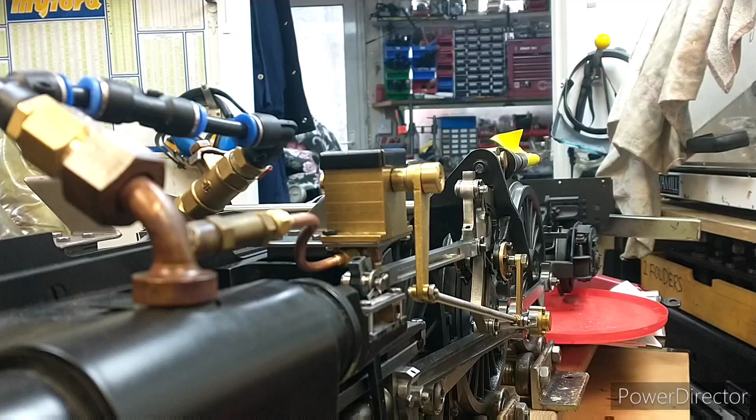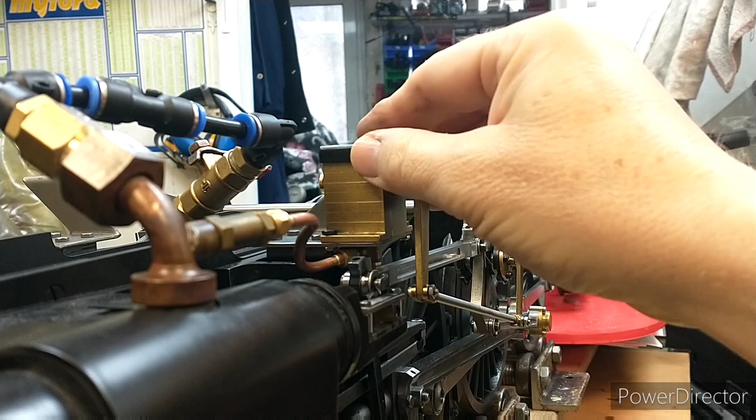So if you remember a couple of episodes back we temporarily fitted, this is actually a Modelworks or Winson lubricator, but we don't have two of them, we only have one. So I think what we're going to do today is actually make two new lubricators that match, because I've got the parts to make them, or most of them.

The main bit missing is this actual outer casing, so yeah, I'm going to take this off and then we'll go to the bench and have a look at what bits I've got and what we need to make.

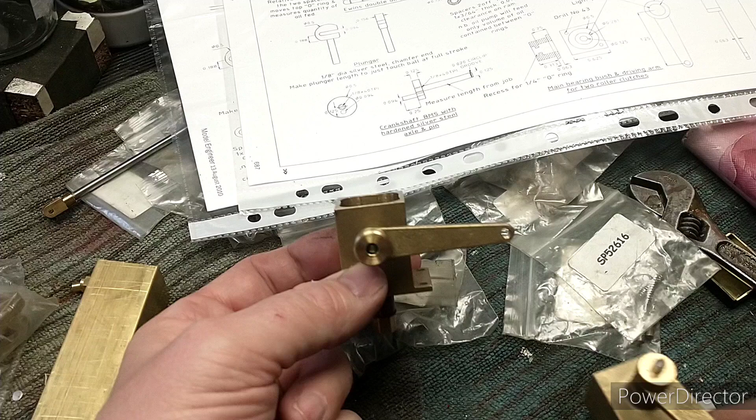Okay, so just a little recap on what we have and haven't got. So I bought this off eBay, and this is I believe from a Winson kit. So it's an earlier design, and this is the latest design you can buy from Steam Fittings.

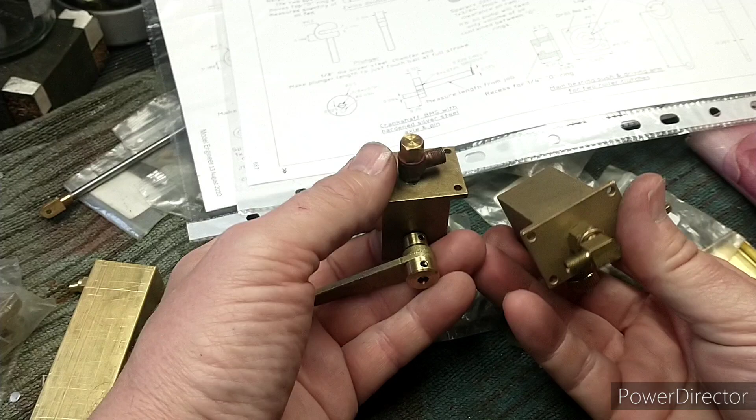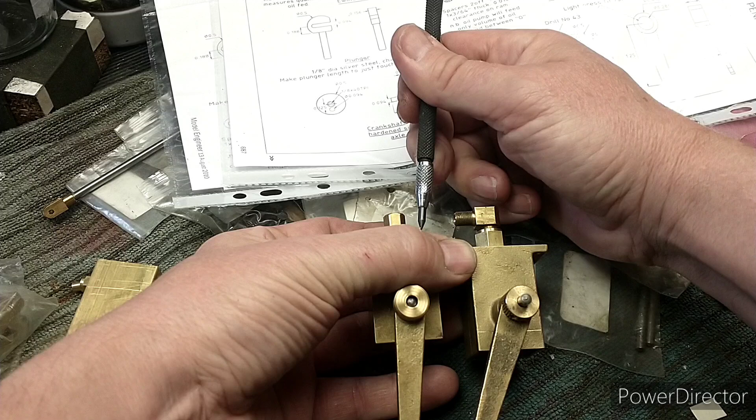So a couple of things we need to look at really is if we look at the height that the outlet comes out of, this is too low down. We've got the slide bars about here, so we need the outlet to come out at this height. So I could modify this design, make this area shorter, which is probably my preferred option at the moment, but we'll come back to that.

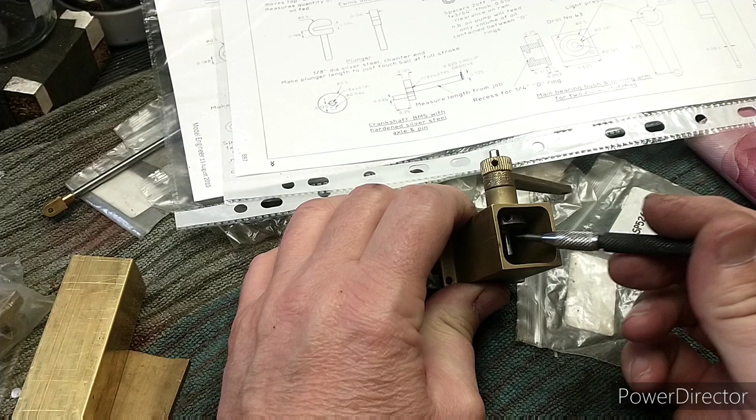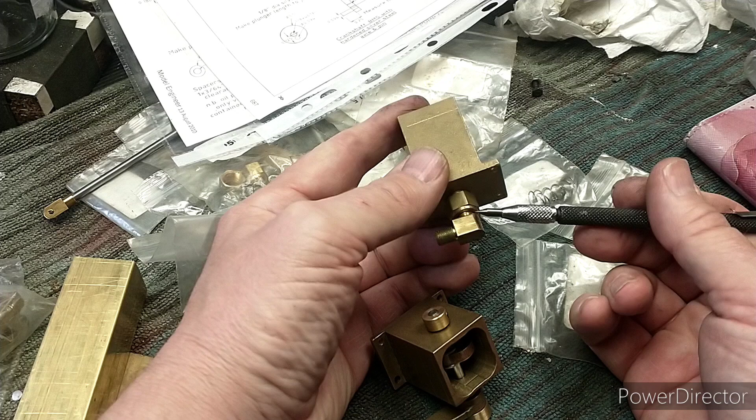I quite like the more modern design because it does away with the crank, and also I think I've got the crank parts. Yeah, here they are. So I've got crank parts for this style of design already. What I don't have is this internal body, I don't think. So I need to have a look through, but I like this design because it just uses a spring to do the return. You know, I've even got the springs, whereas this style uses the sort of Scotch yoke idea. It's a bit more difficult to manufacture.

So kind of internally we want something that looks like this. Externally we want something that looks like this. So that's the problem we have to solve this week.

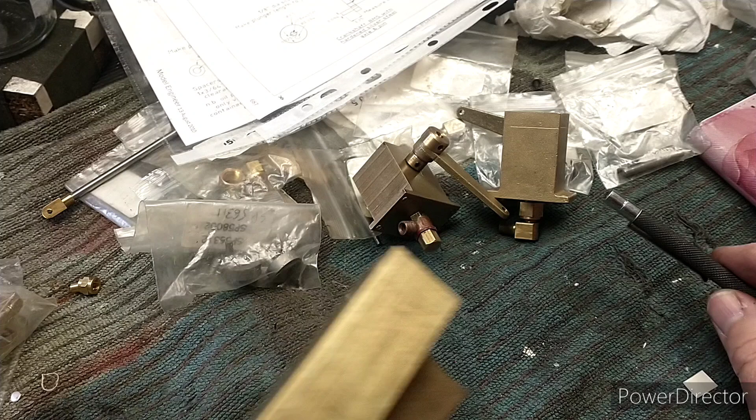So what I'm actually going to do is not use either of these two, but I've got some brass square tubing. It's 1 inch square. I've got some plate, so the idea would be to silver solder on like this. This is conveniently the right width, so that's the kind of idea I'm doing. And then I'd need to add in a boss as well. So I've got quite a lot of parts.

You know, I've got these right angled adapters. These came with the kit, so it's obviously designed for perhaps the more modern style, but just need to reduce this height somewhat. So we've got some internals, but I don't know if these are for this particular design or whether they're for that design. So yeah, I'll have a rummage through all this lot and decide what we're going to do.

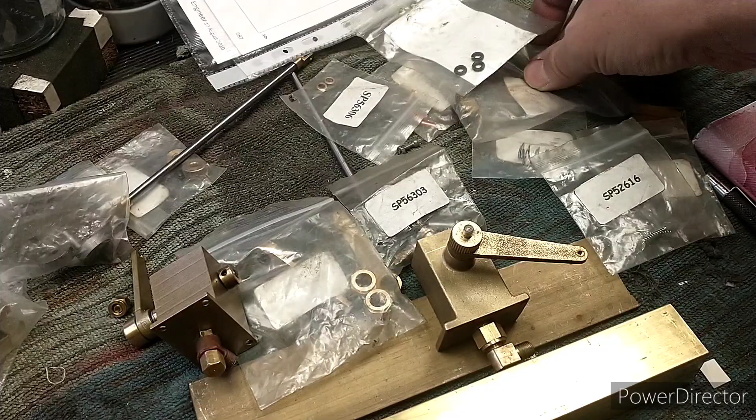Obviously I've got the original drawings which this design was based on, so I can compare it to this as well, so that's quite useful. I'm just dismantling the commercial one so we can just have a look at what parts I've got and what parts I haven't got.

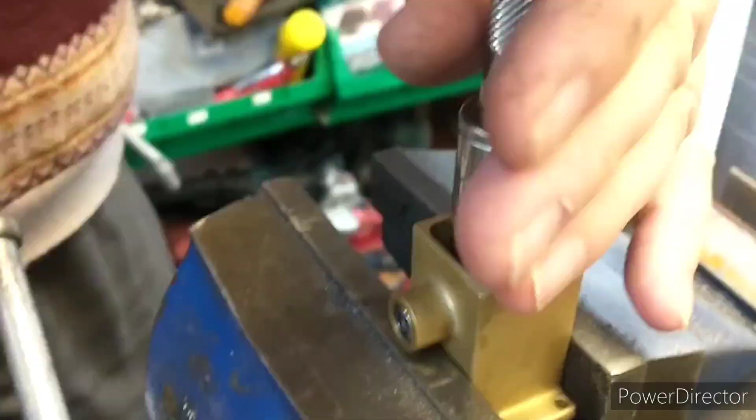Okay, so we've got the modern Steam Fittings lubricator taken to pieces now. Had a bit of a job getting this threaded part unscrewed from here, because you need quite a deep socket to get to this. I think it's 1/2 inch. Well, I think I used a 13mm deep socket.

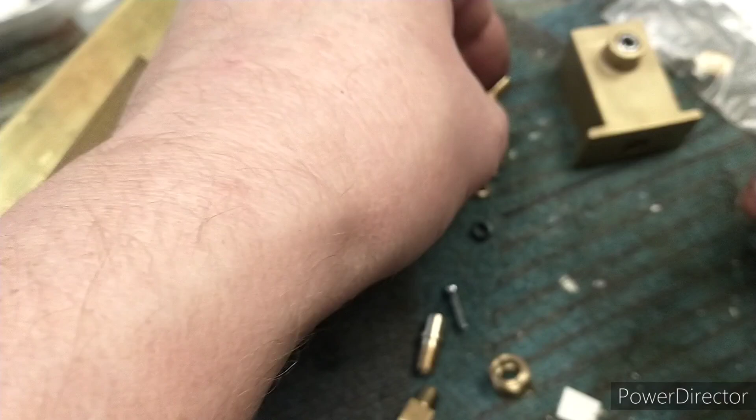But yeah, I think I haven't got any of these parts, so that's going to be an interesting part to make. We've got 2 holes going through at an angle, looks like 45 degrees. That's where the oil actually enters the pump, and there's quite a nicely machined flat surface at the bottom, which is where the O-rings butt up against. That shoulder provides somewhere for the spring to sit, which is quite nice. We've got the springs, so quite handy.

So you've basically got the main pump body, O-ring, spacer. The spacer height changes the amount of oil that's pumped on each stroke. Then you've got the lower O-ring, which acts as a seat for this ball, and then we've got a spring just to preload the ball onto the seat, and then we've got a little spring body that holds the ball in place, and obviously that butts up against that and helps compress the O-rings.

And then you've got the usual conical fitting on the bottom for a pipe fitting. So I've got quite a lot of these parts. I've got the O-rings, I've got all the springs, I've got these shafts, I've got a couple of these anyway, what would you call them, crank I suppose. So actually, yeah, these might be usable. Yes, because they are slightly shorter as well, which is kind of what we want. And we've got the nuts as well.

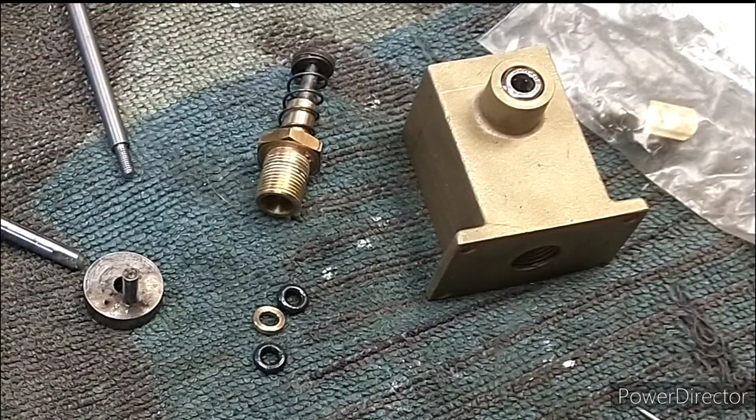So we've got a lot of the parts, and we've got obviously these right angle fittings, which I only need for the 2 I'm making for Britannia. So we have got quite a lot of them. Yeah, so I'm sure I can find a ball bearing or 2. And it's just basically the pump body, the plunger I haven't got, and the actual casing itself.

So we've got some material to make the casing. I'm sure I've got some hex bar stock to make this. I'll have a look at how this is manufactured, but I think it's possibly just machined from normal brass. So that's quite a small part from quite a large blank. That might be quite interesting to make. Might be easy to make in 2 parts actually, but we'll see.

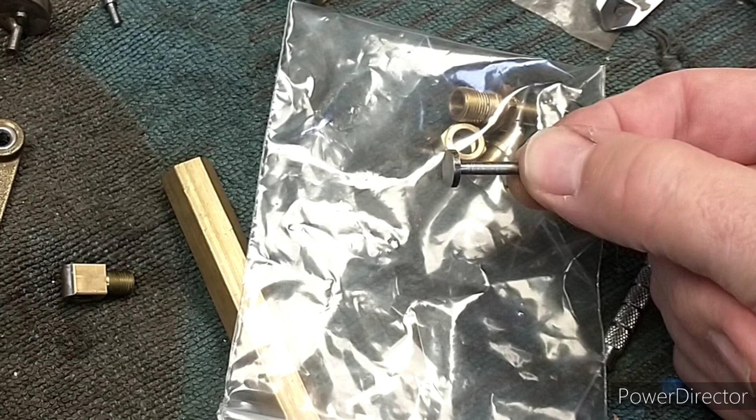So off camera, I've been starting to get some raw stock together. I've got some 1/2 inch hex to make the main body. While I was doing this, I was thinking one of the important things, or something that you gain with experience really, is when you start looking at parts you've got to make and selecting materials, you start to get a feel for where accuracy is required and where it isn't.

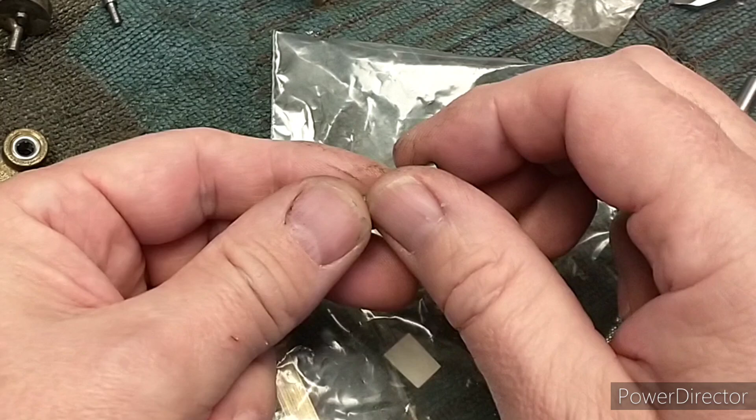So as an example, I'm just going to show you this part. So commercially this is made in 1 piece, which is, yeah, their decision. But I don't know if you can really see here, but the finish isn't actually that great, and that finish is rubbing on a rubber O-ring, and that's obviously going to wear the O-ring. So anyway, looking at this part,

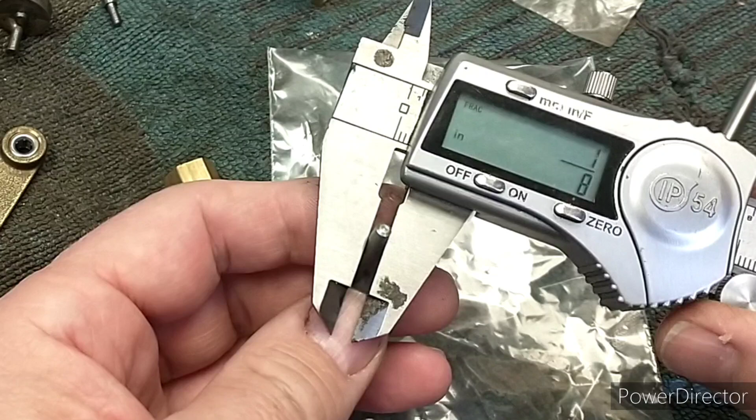the most critical dimension is this diameter, and it's basically 1/8, and that's sized to match the bore of the O-rings. The size of the head is about 9mm. It doesn't really matter, and I don't think the thickness matters particularly either. Probably the length does, and if you can see, there's a little chamfer there. That's quite important, just to ease the shaft as it goes into the O-ring, so it doesn't damage the O-ring.

So if you were making this from some 9mm bar, this in comparison is quite thin. You're taking off a 3mm cut effectively. Now if you're using a CNC machine, you could probably do that cut in one pass and get decent results, because obviously if you're trying to just do a skim pass on something that thin, it's going to deflect a lot. But on a Myford, there's no way I could do that cut in 1 or 2 passes.

So for my case, and thinking about where the accuracy lies, I have got some 1/8 silver steel, and this is obviously ground. It's got a little bit of corrosion on, that'll clean up, but it's a ground finish, so that's a really lovely smooth finish. So what I'm thinking is that I'll use this to make the shaft, just some 9mm bar to make the head, drill a hole through the head, and then silver solder this shaft into the head, because again, this area here is not particularly critical.

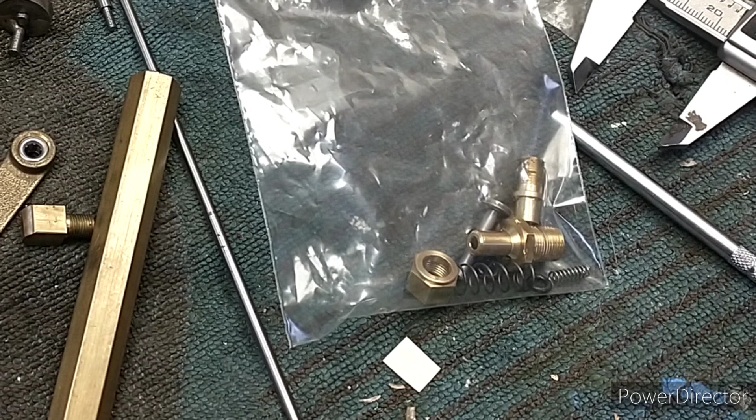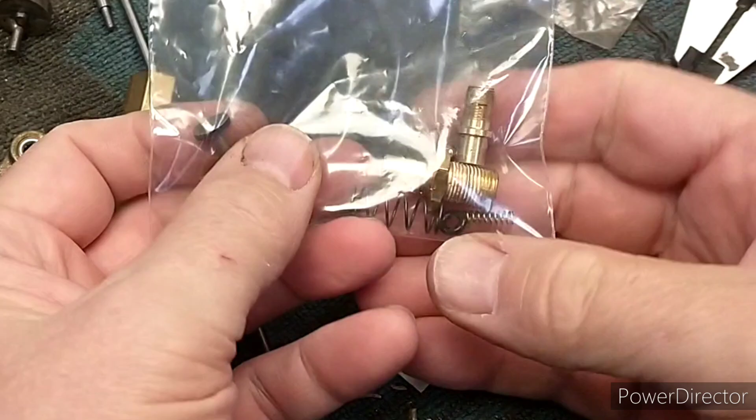So yeah, I just thought I'd mention that, because it's part of my thought process when I'm assessing how to make parts. Some people like to write down machining operations. I'm not usually that organised, but I do try and think through the order in my head. So just a few thoughts on machining operations really.

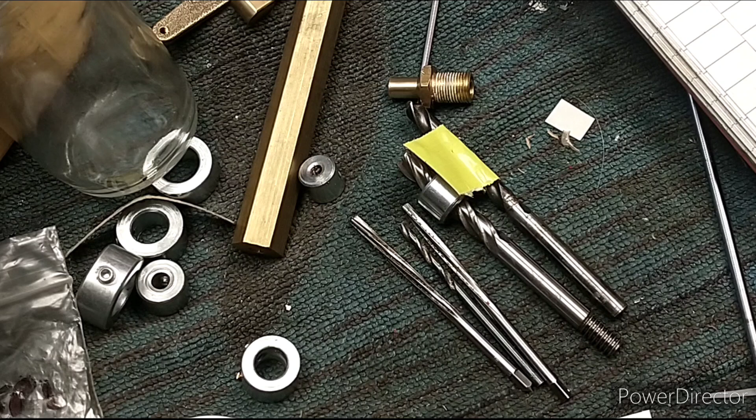So I'm going to make the pump body first from 1/2" hex brass. It does call for phosphor bronze, but I think brass will be fine. So I'm going to start machining from this side. It's a 3/8 32 TPI thread, so we can machine that up quite quickly.

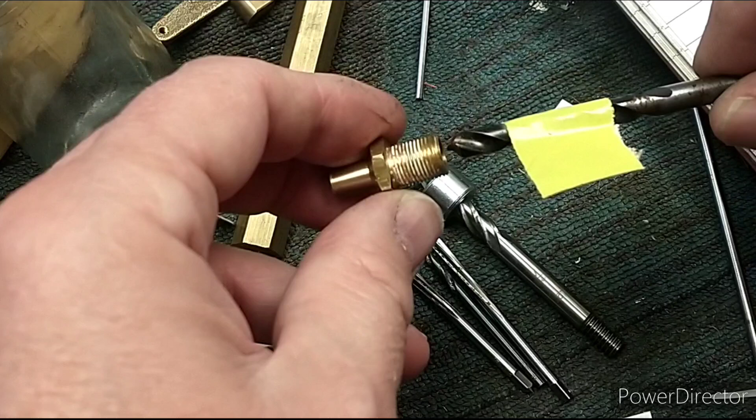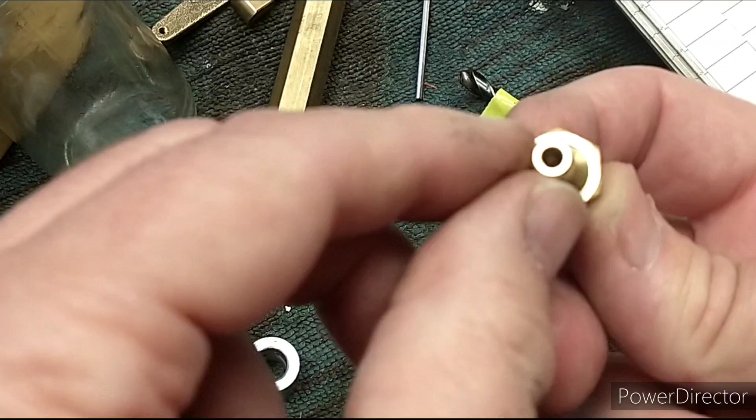And then I'm going to drill one size below 1/4 inch, and then I've got a 1/4 inch end mill there that will just give me a nice flat bottomed corner. Then we've got one size below 1/8 inch, so we'll go through with that, and then I've got an 1/8 reamer. So if we do all of those operations from this side, including the 1/8 hole through, that will mean all of the circular features will be concentric.

The outside of this isn't particularly important. All it's doing is acting as a guide for the spring. But we want the hole concentric to this hole, so the actuating pin goes through the centre of the O-rings. So we have got some wiggle room there, but if we can get them all concentric, it's all the better, I think.

So I'll basically machine all this end from this side, and then we'll turn around and machine that. And I think I can probably get a tool with that angle on roughly. Again, that angle's not particularly important. It's just to provide an easier to machine area to get these angular holes through.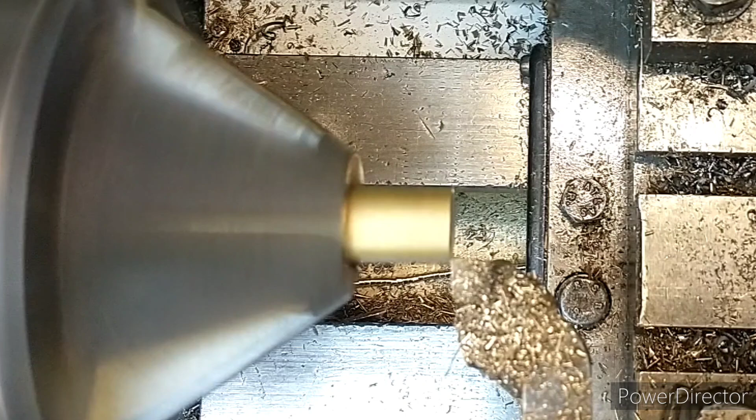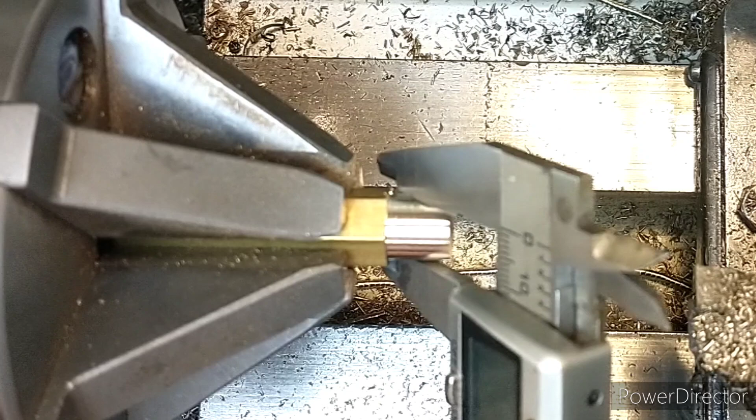Okay, we'll face off the hex bar and zero our DRO. Just set my DRO so I know roughly where we've got to. This is where you get completely covered in tiny shards of brass.

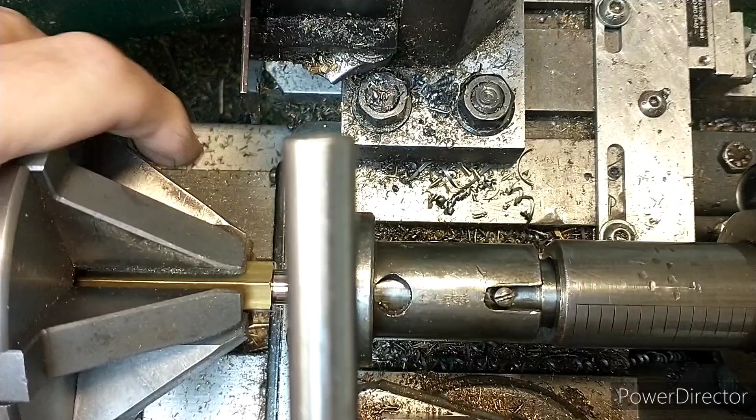There we go. Next job, we'll just round off the edges a little bit. Just make it easier to get the die started. Okay. Right, I'll get the die set up and we'll get it made. So I'm using the tailstock die holder today. So we'll just apply a bit of pressure and then we'll just turn the chuck by hand. It's quite a fine thread, the 32 TPI, so

I don't know if we could jog this. Shall we have a go? Oh yes, that'll work. That makes life a bit easier, doesn't it? Okay, let's try and reverse it out.

Lovely, that's perfect. We do need to just undercut there a little bit. We'll just come in with the blade tool and just plunge it in a little bit. Hopefully that just gets rid of that shoulder. Reshamfer that. The threads have raised the metal slightly.

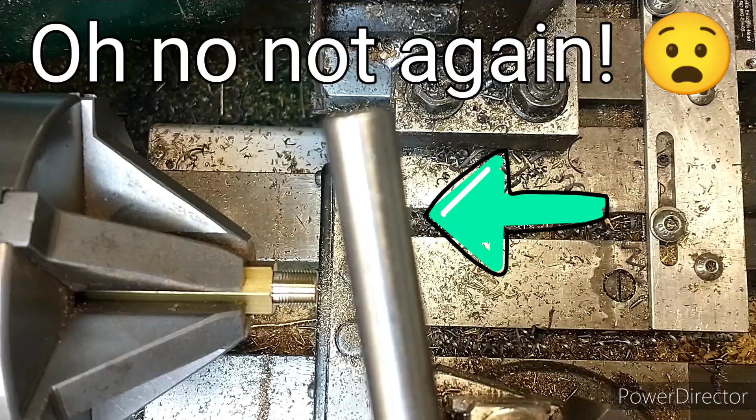Okay, so next job we can do is drill through the 7/64. So I'm just looking at the part that we're making. If this drill goes all the way past where we've got the flutes, that's just about the right depth. Handy little tip in this particular case. So we will need to keep cleaning the flutes because this is quite a deep hole.

Anything over 3 times diameter depth I think is classed as a deep drill. I think something like that.

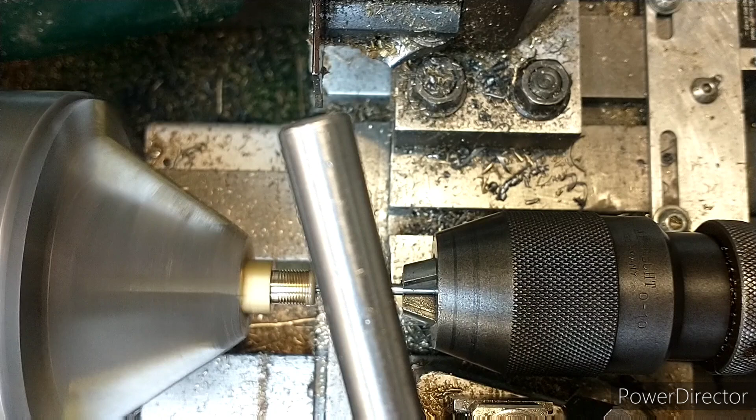Could leave this till I'd done the bigger hole actually, might be a better way of doing it, so we're only actually reaming the part that needs to be reamed. So I should do that. I should change my order of operations for the next part. Right, I think we're up to the end there. Yeah. So that should be a nice 1/8 reamed hole. Again, we can use the part that's going to match effectively.

That seems pretty good. Next job is to open this hole out. So I'm just using a bit of tape as a depth stop. I don't actually want to go all the way up to the tape. I just want to leave about a mil. That's that. And then finally we're going to open out to the 1/4 inch size with the 1/4 inch end mill. The slot drill would be better, but I haven't got a 1/4 inch slot drill.

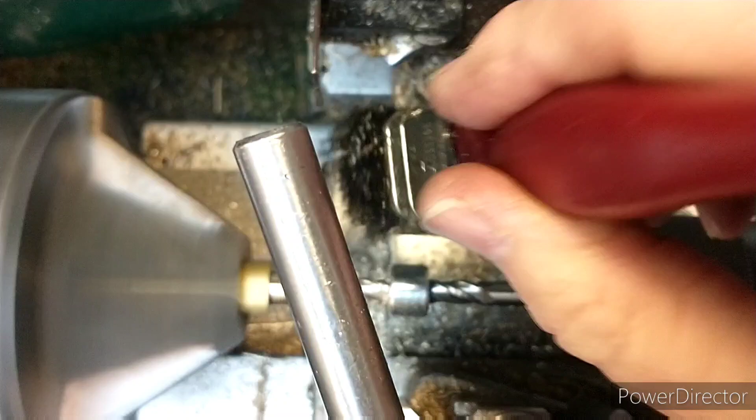Lovely. So that's given us a really nice flat bottom hole. Just going to check the depth of that. Yeah, spot on. So I can now part this off and then make the next part.

One thing I have found is this 6-jaw chuck actually isn't that great holding hex bar. I think it would be brilliant, but you have to get the piece exactly right. Use my handy bendy usual bit of... so, 24.5 long. Go slightly over. So that's the part. So we'll make another one of those.

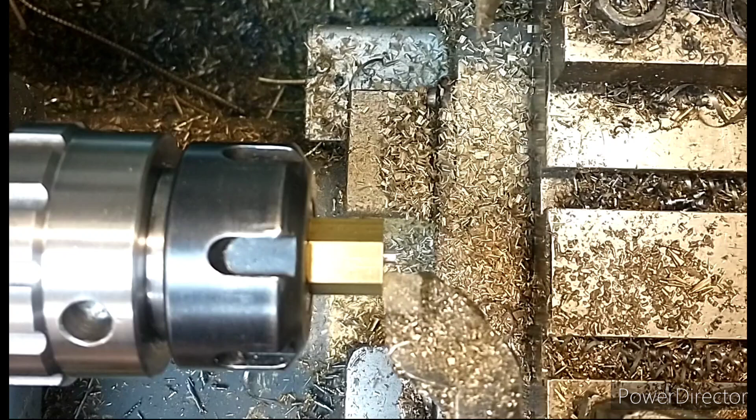Okay, so I've turned the part round and put it in a collet chuck. So I did actually invest in some Imperial ER25 collets. So this is actually a 3/8 collet. So the first job is just to shave 0.1 of a mil off the end of this. I just part off very slightly bigger than I need to. Okay, so that's it now to length.

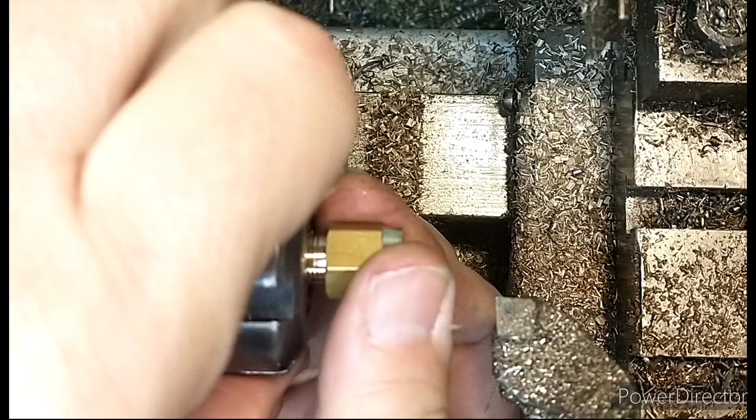Oops. Wasn't as tight as I thought it was. Yeah, I think I was a bit greedy there. I think that was because we were still on the hex part.

We're a little bit below 3/8 in the diameter, so with it being threaded as well, I think that was probably just a little bit too much. Something had to give. Initially going down to 9, which is the extent of the conical area.

Need to find a tool that I can use just to put the 45° on this shoulder. So if we were in a production environment, we'd grind a special tool that would actually allow us to cut this diameter and the shoulder as well. But I found a threading tool, I think it is. It should get in there. So fingers crossed. That's as good as we're going to get now. It's quite an awkward spot to get into.

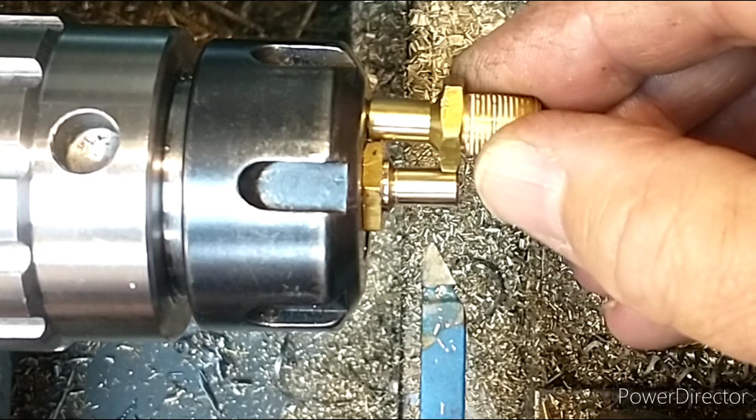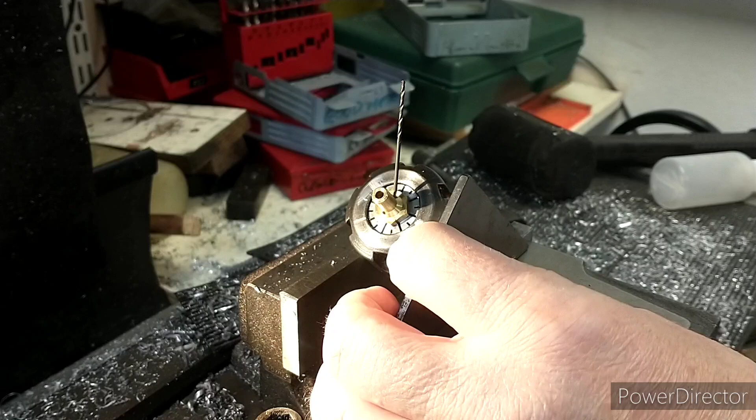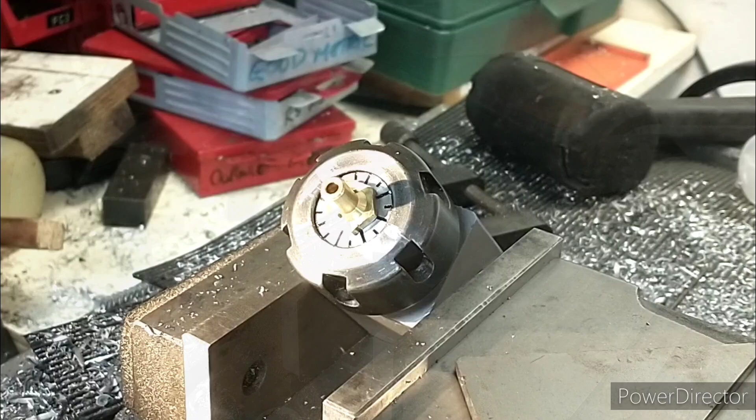Okay, so this is my setup for drilling these diagonal holes. I did think they were about 45. They are about 45, but just not quite exactly 45. So I've sort of lined this up by eye to be vertical. Now the modern design uses a 1.4mm drill, which is what I've used just to set up my angle, and it's only got 2 holes, if you can see there.

Now the original design calls for 1/16 drills, which is about 1.6mm, and requires 4 of them. So I think what I'll do is I'll put 4 holes in, but I'll use the slightly bigger one. The fact that I've got a box full of these, so when I break a few it's not the end of the world, has got nothing to do with that decision.

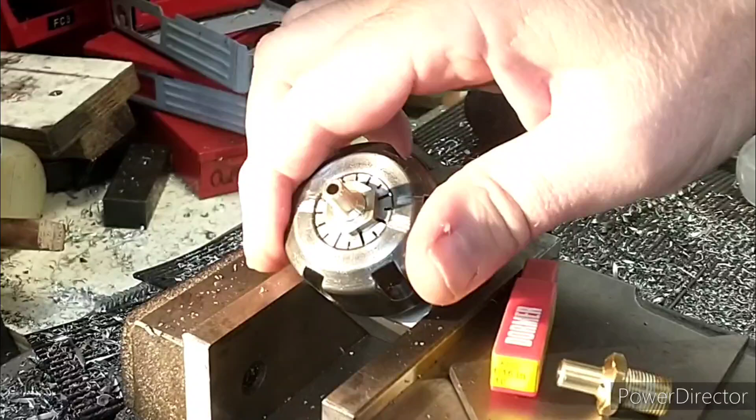So what I think I'll do is I'll keep this fixed in the vise to keep the angle, and then I'll take these out and rotate them round. So I'll try and keep a flat about horizontal. Not critical, I don't think.

And prior to drilling, I've got these stubby... it's probably better to actually see what it is. Sort of stubby spot facing drills. So they're quite stiff. So I think I'll just spot with that one first, because that seems to get in all right, and then follow up with the 1/16. And hopefully we won't break any drills at all, and it'll all be lovely. We can always hope, can't we? So I'll get that set up, and then I'll bring you back.

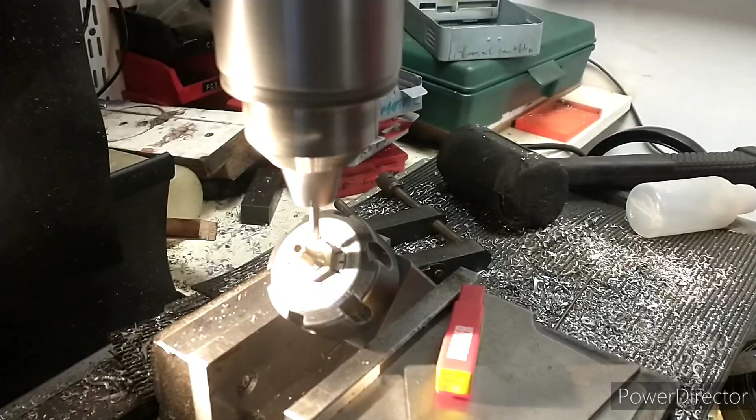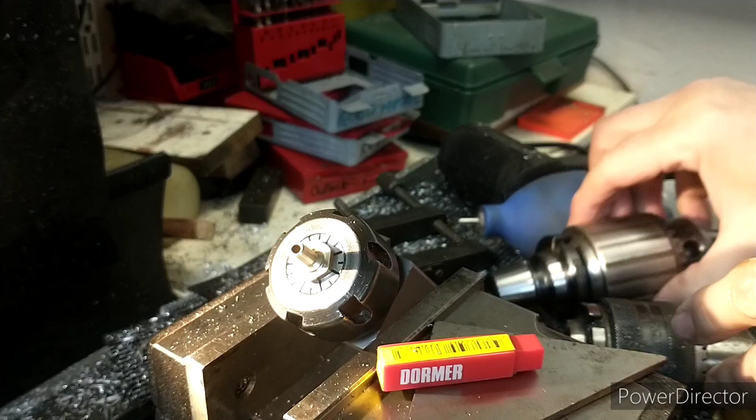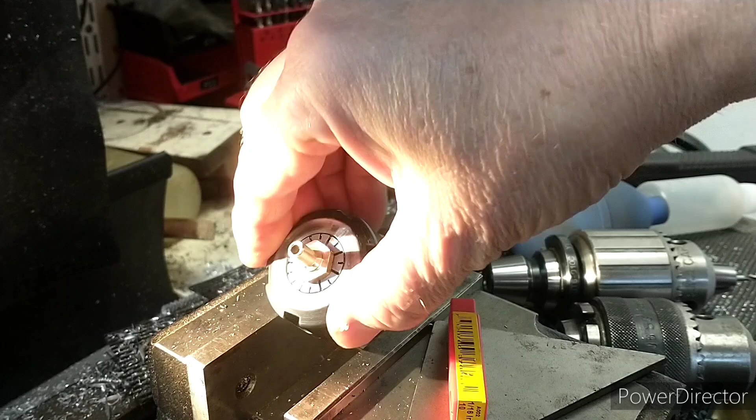Okay, so that's spot faced. Right, that's the first hole done, so 3 more to go. Let's see if we can do it without breaking a drill. So next thing is to rotate this round so that the previous hole's at the bottom, as best we can. Get that there. Not critical, but we'll try and get them opposite each other anyway.

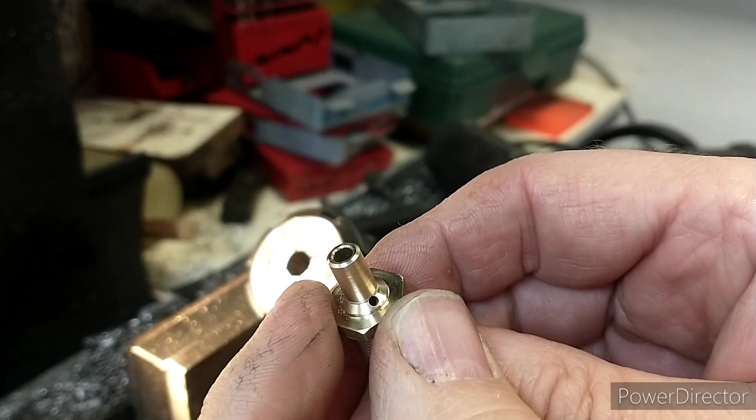So hopefully you can see that. So they've both gone through. Just about see there. So hopefully that's good enough. So I'm just going to run the reamer through by hand just to deburr the hole. I think this reamer's a bit newer, so I'll run that one through as well.

And we'll do that one as well. Not sure if you can see, but I can feel there's a little bit of... it's actually cutting. That's the silver steel. I can certainly feel where the burrs were. But that seems to be okay.

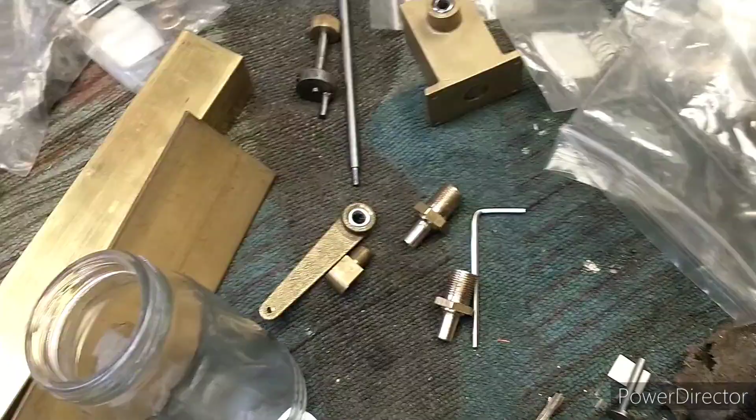So the next job is we're going to make the plunger. So just for Kev, I'll have some gratuitous hacksaw action.

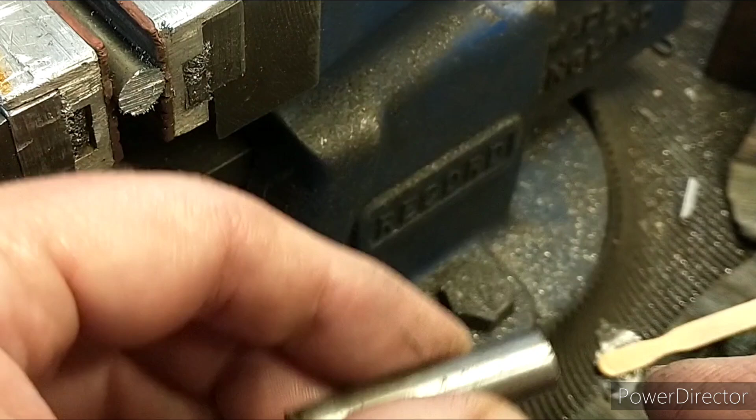So what I'm going to do is drill a hole in each end of this for the 1/8 bar, and then I'm going to silver solder them in place, and then once that's done I shall put this in a collet and just cut off the head so it'll look like that. We'll just put in a parting tool, so that's why I've made this a bit longer, so that we can put either end in the chuck, and there's enough to hold it. So that's a trick, if I can make a part on both ends of a piece of stock, it just speeds things up quite a lot. So that's what we're aiming to do.

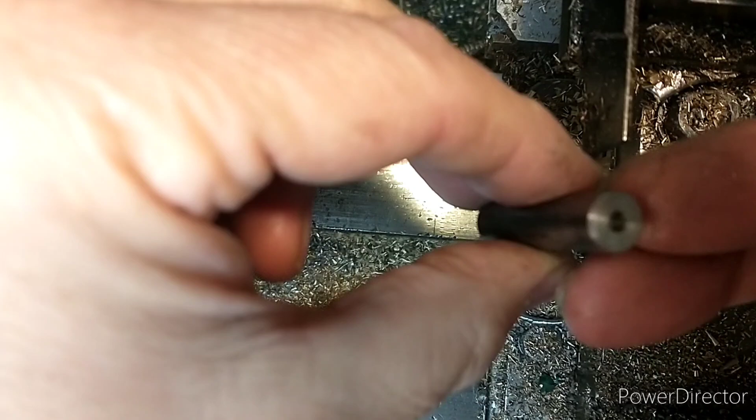Okay, so now I've got this piece of metal with holes in each end. So what I'm going to do is put the silver steel in, measure what distance I need for each side, because obviously that's a hard stop, to get a matching plunger length. And we'll do that for both sides. I'll try not to get them mixed up, and then I'll cut the silver steel to length. Make sure it's got a nice chamfer on the end, and then we'll silver solder these into the head.

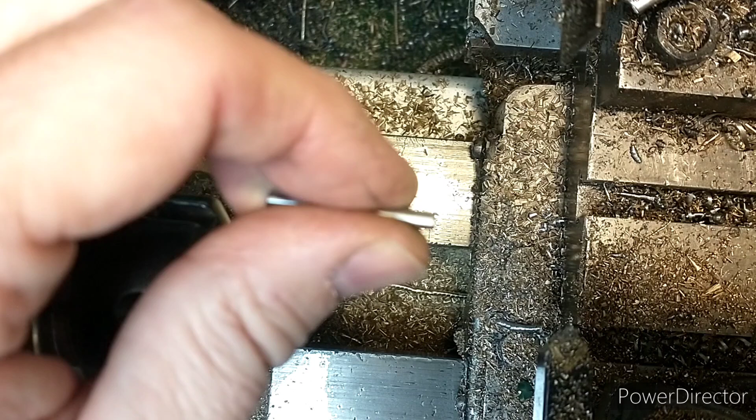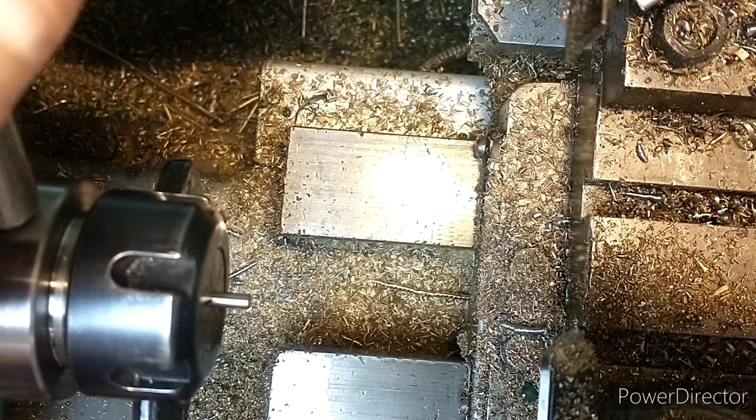Okay, so you've just seen me face off and chamfer this. So this is an arbitrary length. I don't know what the actual length of this is yet, but it's too long. So I'm going to put it in one of the holes in the piece I've just made, and I'll measure how much I need to take off this, and then I'll do that in the lathe. So I've just measured that, and it's just under 1 mil too big. So we'll zero up the DRO and take 1 mil off the end of there.

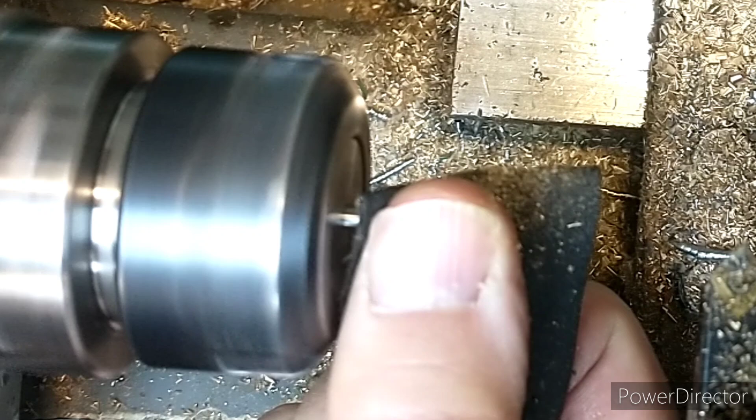I'm just taking 1/4 mil cuts here because it's silver steel. It's quite tough. I don't want to break the tip off my cutting tool more than it already has anyway. I'll just round that off a little bit as well. I don't want to damage our O-rings. There we go.

Okay, so hopefully you can see what I'm trying to do here. This is the silver steel, and that distance, when this is solidly in the hole, is exactly the same as this. So what I want to do now is silver solder these in. I've obviously got to be careful that stays pushed firmly into the hole, which can be a problem if you've got some wet flux in there. It will turn to steam and it will try and force this out. So I need to get some weight on the top of that. So yeah, that's what we've got to do next.

Yeah, I could do some silver soldering. Once these are silver soldered, we can then put this piece in the lathe and sort of just cut these off slightly longer, and then mount it on this part and just turn the head to suit. Yeah, so let's carry on with that.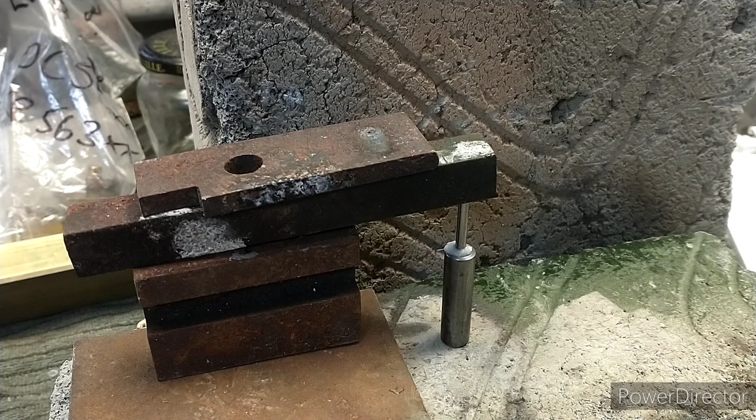Okay, so I'm going to do one end at a time. I'm going to try using the little chef's torch initially. If that doesn't work, we'll have to use the bigger torch. This is sort of a bit borderline because there's quite a bit of mass there. So I've had to put quite a bit of weight on to try and stop that popping out when it gets warm.

So we'll see how well this works. I think I'll just gently heat this bottom part first. You see that pop out then? That's what I was afraid of. Okay, so I'm applying a bit of downward pressure to counteract the steam. So hopefully the steam will come out the gaps around the pin.

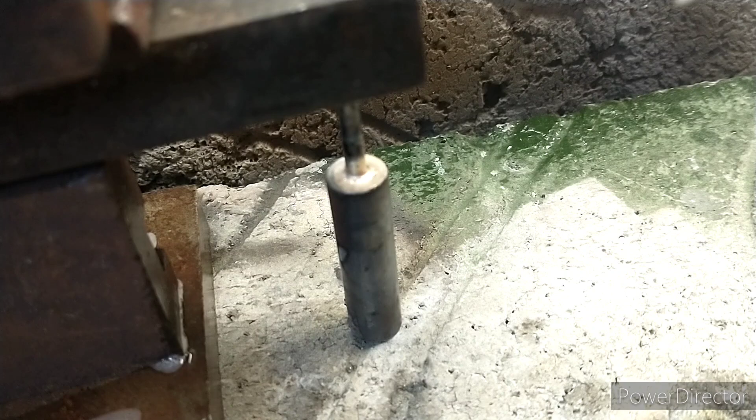Hopefully you can see I've got a really nice fillet of silver solder there. It's spread out a little bit on the head, but I'd rather a little bit too much than not enough in this particular case. So that should be nice and strong. Let's hope it's all still in a straight line and the right length.

So as you can see, we have oxidized the plunger, so I've got some quite fine emery paper. I'm just going to clean off all the oxidation.

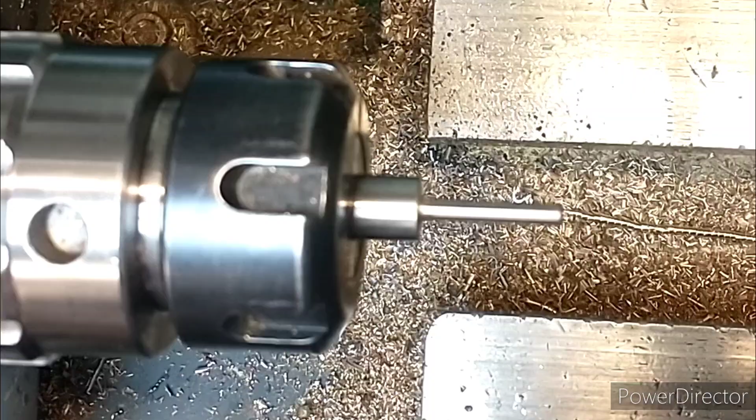So hopefully you can see that what I thought was silver solder coming up here is actually just sort of an image of where the flux had ridden up the shaft a little bit. All I can see in the silver solder, which is slightly gold colour, is just a really nice fillet. So I think we're good on that. I'm just going to double check, but if that's okay, we just need to part off the head at 1/16 and clean the head up. So really pleased with that. That's looking really good.

Set my zero. Just want to come out just slightly more than 1.6 mil. And we'll part it off. Now when we get to near the middle, we will actually be parting off silver steel, so we might need to add a bit of lubrication in there, but let's see how we get on.

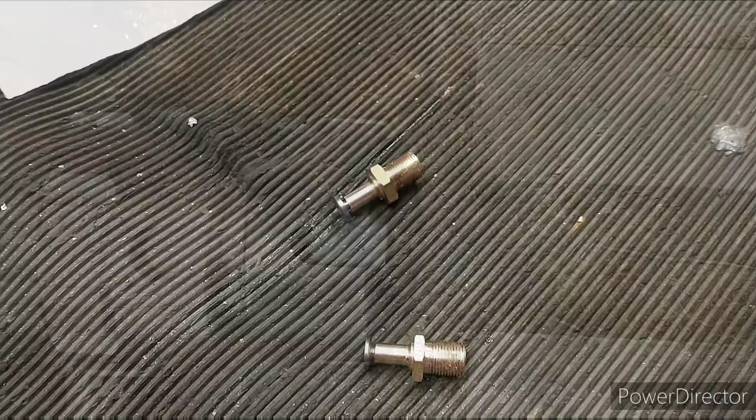I think I will just clean up the head so it's nice and smooth as well. There we go. Lovely jubbly. Yeah, I think that'll do. So after starting to edit this video, I realised I've got an absolute ton of footage. So what I'm going to do is split the video into 2 parts.

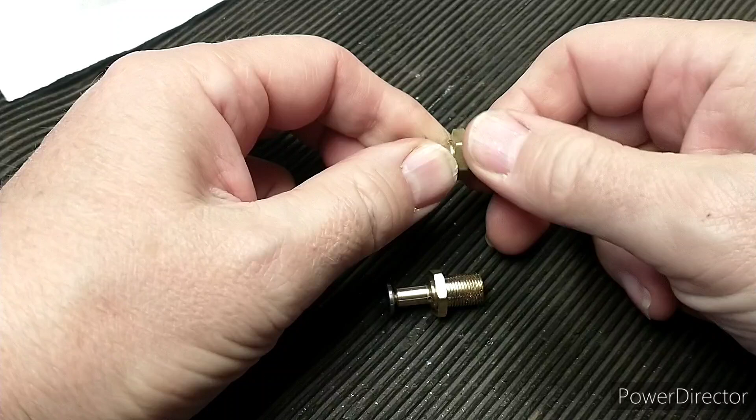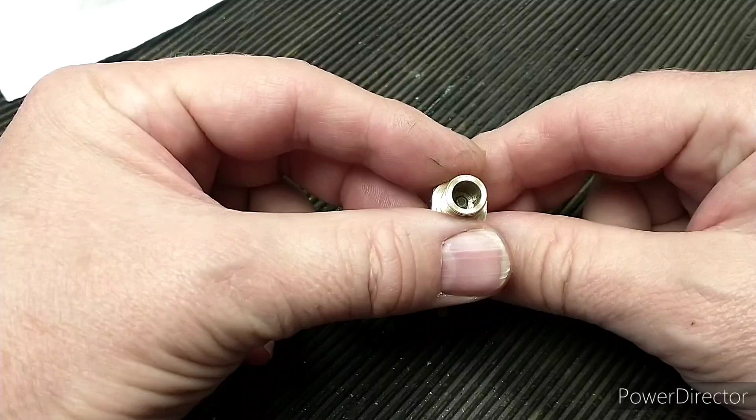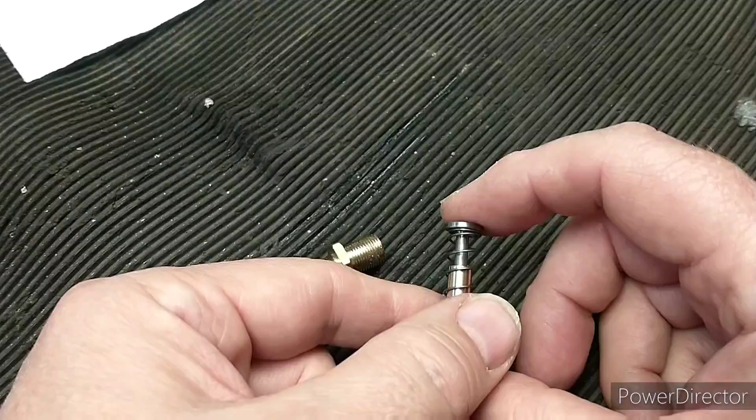So what we've produced now is we've got the new pump, what's called the pump body, and you can see that's quite a nice job. It just needs a bit of cleaning. And we've done the plunger, so that assembly is now ready. So that shows how it works. We've got the spring there which returns after the cam's pushed it, so that's our pumping action. You can see the plunger poking through the pump body.

So we'll need to check that the amount it comes into the body is correct. I'll compare that with the commercial one, but hopefully that's okay. So I'm going to leave it here.

Apologies for some of the lathe footage being a bit under par. I will have serious words with the camera person.